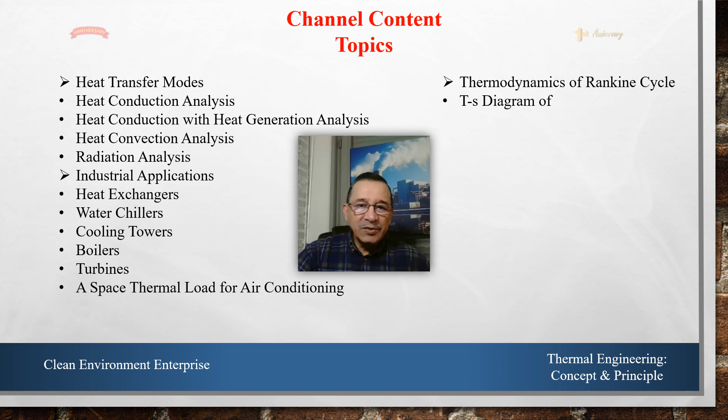Here we have some of the contents which have been published in this channel. We passed through heat transfer modes, their applications, industrial applications in heat exchangers, water chillers, cooling towers, and many other industrial and technological parts in this field of engineering, where energy is the principal factor in this equipment. We also passed through thermodynamics of the Rankine cycle, the main components of this cycle, which is

used in electricity production in power plants. We applied the first law of thermodynamics and waste energy recovery, how can we use it to produce electricity and improve the efficiency of plants. We also focused on geothermal energy in power plants and heat pumps.

And finally, we arrived at the thermal design of geothermal boreholes.

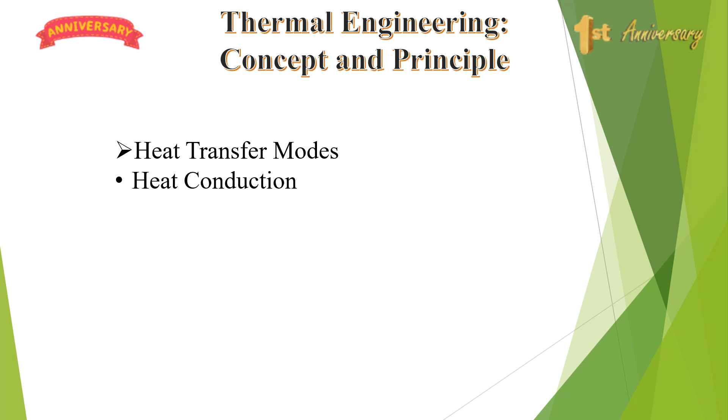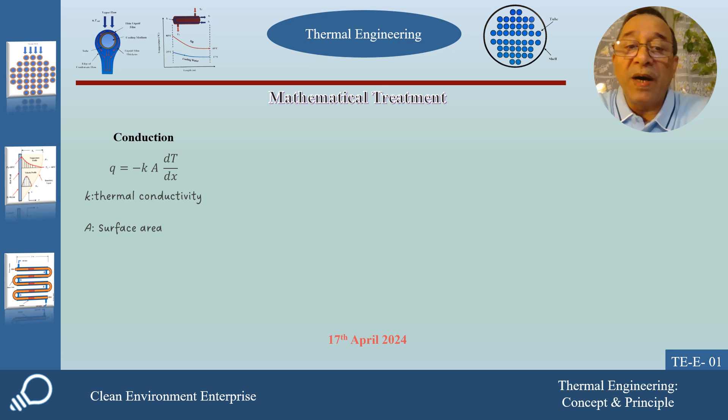Finally, we may find a mathematical treatment for these modes in this part, where conduction is usually defined as Q equal minus K A dt by dx. K is the thermal conductivity of the material. A is the surface area, which is usually considered as the perpendicular surface area to heat transfer, and dt by dx represents the temperature gradient.

For convection, we have the heat transfer rate equal to H times A delta T sub W. H here is the heat transfer coefficient of the fluid. A is the same, the surface area of the contact heat transfer area between the fluid and the solid. And delta TW represents the temperature difference between the wall of the object and the moving or still fluid.

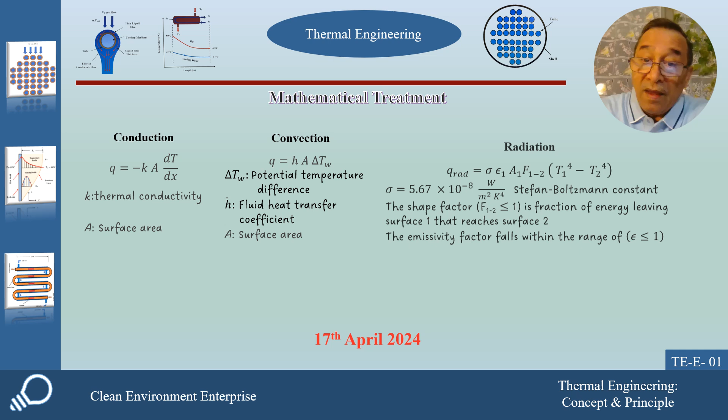Finally, we have radiation, which is defined in a general form: sigma, A1, F sub 1,2, and then the temperatures powered to 4. We have sigma, the Stefan-Boltzmann constant, which is a fixed value, and F sub 1,2 represents the shape factor, which is usually less than or equal to 1. It is defined as the fraction of energy leaving surface 1 that reaches surface 2.

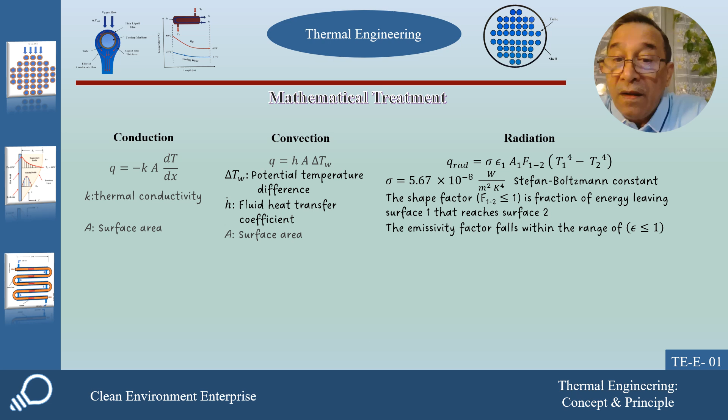The emissivity factor falls within the range of epsilon, which is less than or equal to 1. We should note that radiation does not require a material medium for energy transfer, unlike the conduction and convection modes. It can be transferred through vacuum, gas, or liquid.

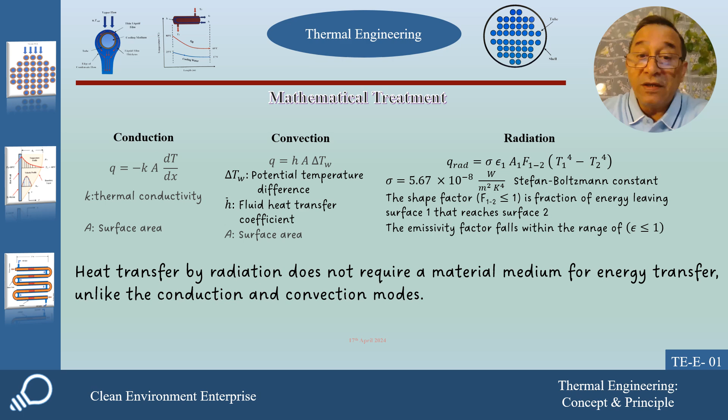And this is the final part of this seminar, and I hope that you will enjoy its content.

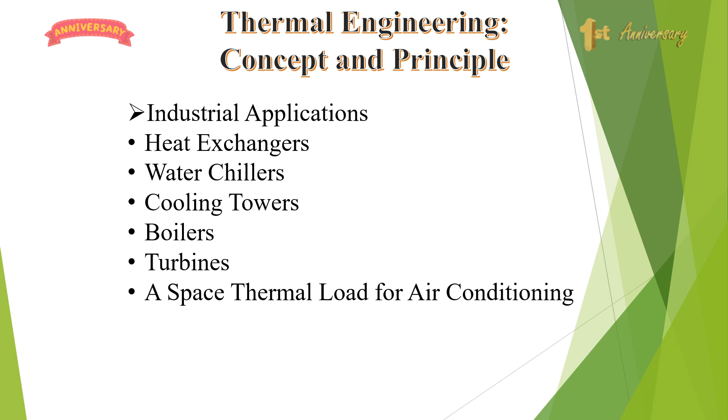The fluid flow arrangement in the heat exchanger, as we are talking about shell and tube heat exchangers, is the same for other types of heat exchangers. So there are two main types of fluid arrangement in the heat exchanger. The first one is called the counterflow pattern, and the second one is called the parallel flow pattern.

In the first type, the fluids on the shell side and tube side enter the heat exchanger from opposite ends. Therefore, as they pass through the heat exchanger, the flow is counterflow.

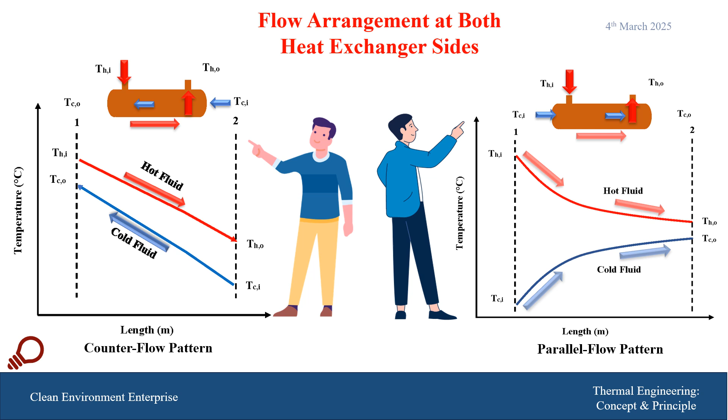At the same time, for the other type, the fluids enter from the same end on the shell and tube sides, and they leave at the other end in the same direction. Therefore, as these fluids pass through the heat exchanger, they follow a parallel path.

So if we talk about the counterflow heat exchanger, if we look at the blue line, which represents the cold fluid, it enters at T sub Ci and leaves at T sub C o. And when we look at the exit temperature, there is a possibility it could be higher than the exit temperature of the hot fluid.

On the contrary, if we look at the right hand side graph, the cold fluid enters at T sub Ci and leaves at T sub C o, and there is no possibility for it to be higher than the exit temperature.

In general, all heat exchangers are preferred to have a counterflow arrangement. In counterflow, there is a uniform temperature distribution and it provides a good temperature difference between both fluids, so it is more efficient than the parallel flow pattern.

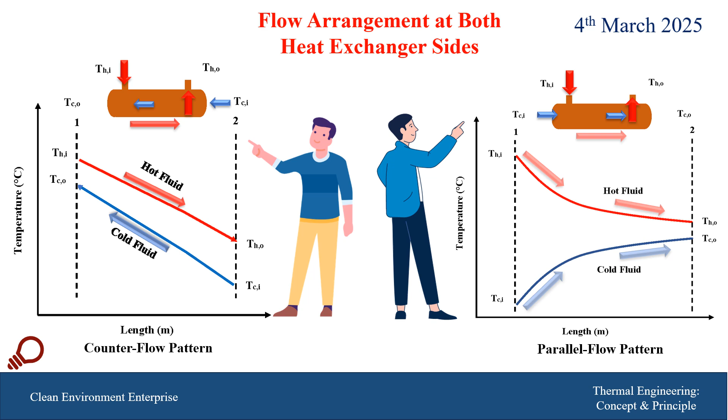In the energy sector, especially for waste energy recovery and power plants for electricity production, the Rankine cycle is usually used, even in geothermal systems where we can produce electricity in power plants.

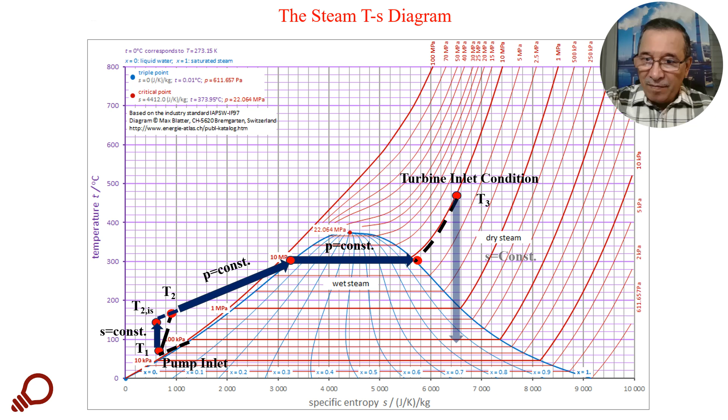After that, in the boiler it is usually superheated to a temperature represented by T3. In boilers the temperature is usually very high, maybe 560 Celsius or more, and the pressure is high as well. So at T3, this is the condition where it enters the turbine. Again, in the turbine, if we assume constant entropy or isentropic process, the expansion will follow the blue line, and the temperature and pressure are reduced to a low value.

But in practice it will follow the black dotted curve, with a dryness fraction greater than 90%, meaning that at the exit of the turbine part of it is liquid and the rest is vapor. Then it enters the condenser at condition T4. Here the condensation process is assumed isothermal and at constant pressure.

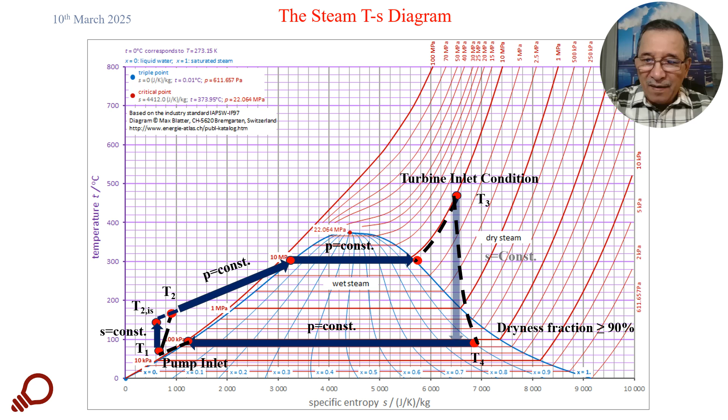Then the liquid obtained as a result of rejecting energy to the cooling water, for example supplied from a lake, a river, or even a cooling tower, will reach the saturated value, saturated liquid. Usually in practical power plants this temperature is reduced to T1 as a subcooled liquid before entering the pump, to improve the thermal efficiency of the plant. This is how the Rankine cycle is usually presented on a TS diagram.

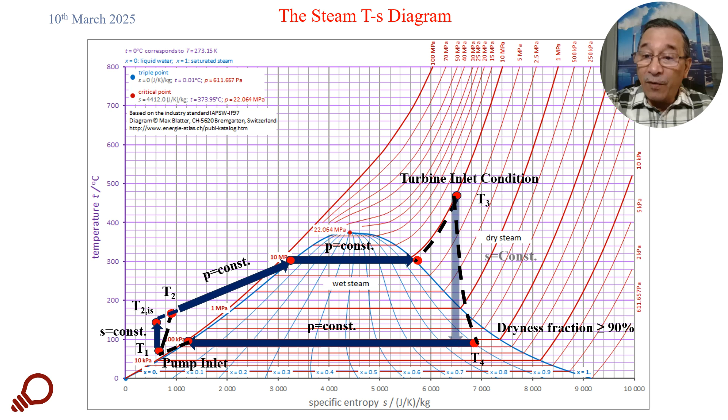Of course this is for the simple cycle, but it can be used as a guide for the complex Rankine cycle, because usually we have other helpful or assisting components such as heaters, which are used to preheat water before entering the boiler, and can be added to this graph.

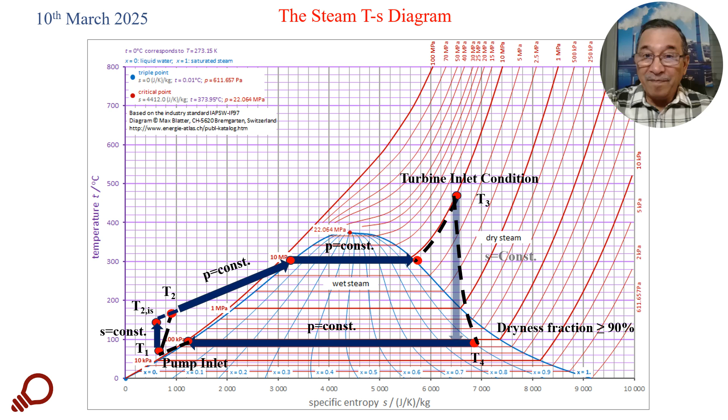In that way we have extracted energy from Earth and transferred it, for example, to domestic use. So heat can be transferred from the ground to the utility. In this case, the utility is heating for a house, or maybe a restaurant or other applications. So this is the heating mode, how it operates.